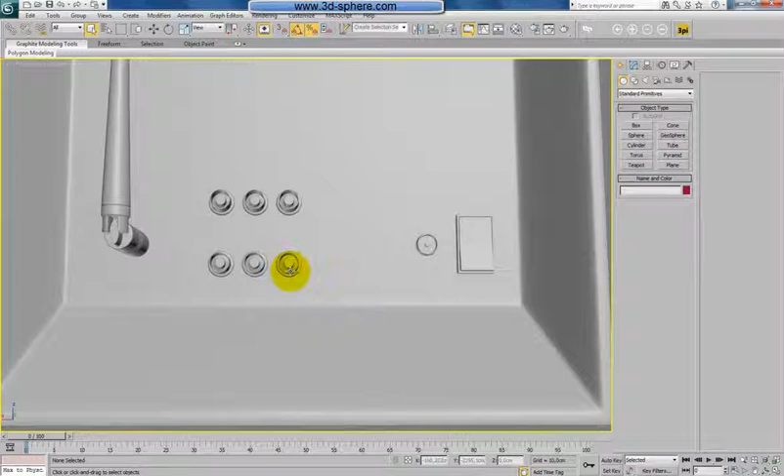So we'll continue with the DVD player here and also look at some details. By the way, I was checking the cinch connector, and if you don't look at something for a while, you will screw it up, like me. So I made a small mistake with the cinch connectors - the inside of the cinch is actually reversed. I'll show a bit later how it should look and fix this. But now I would like to start the DVD player.

I will hide and unselect it. Now, even though we will be rendering just from this side, I would like to do some details here, like the plugs and so on. First, I will select this edge here, connect, and apply extrude there.

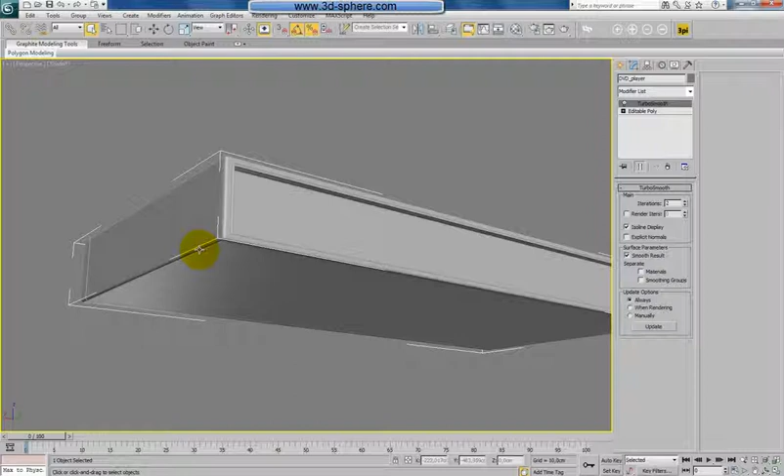This is for a simple reason - the DVD player should have a chassis which you can remove. It's this part, and we would like to show that this back part and the front plate will stay after you remove this chassis. Of course, we could do the cuts here, or model the chassis absolutely separately to make everything look real, and we could do a separate tutorial just about this, making every tiny detail. But we are not going to sell this model, it's part of the home theater, and we'll always be rendering this from the front. Still, we are going to do some details here.

So first I will delete this. Now I'll be working just with this back plate. What I will do is select all the polys here, grow that twice, then select, edit, select invert, detach this part, and hide unselected one more time. I did this because we'll be working just with this plate, making some shape merge stuff, deleting some edges, chamfering, and a lot of stuff with this, and I really don't want to mess up the front panel. We could accidentally select something like this - there's nothing. We could actually work in isolate mode too, but I think it's the same and does the same stuff.

Okay, let's go to the back view. Now we'll draw some rectangles here to show the separate parts, mostly using the rectangle tool. First the HDMI port. I'd like to do 4 HDMI ports, some USBs, the cinch for audio and video, and the power plug and power switch. This kind of detail, I think it's pretty enough. I don't want to do a SCART connector - it has a lot of holes, and to make that will take a lot of time. Anyway, nobody uses that anymore.

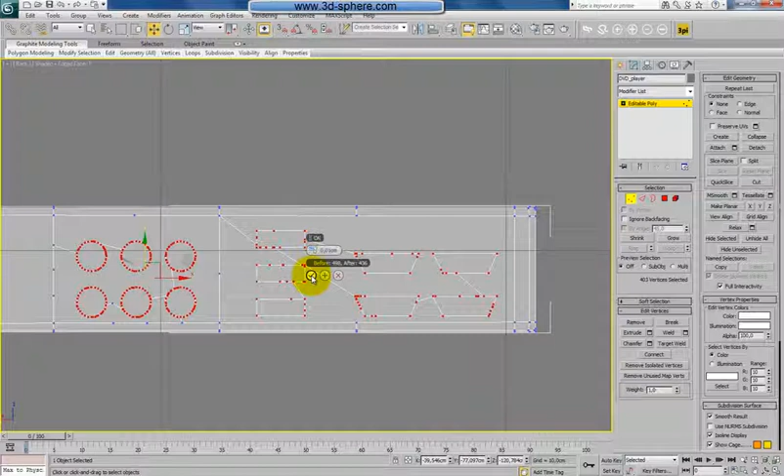So let's go here, compound objects, shape merge, pick a shape. Okay, convert to poly one more time, select the shapes, delete. Let's go here. First of all, vert, weld the smallest value, and we will get rid of a few verts, but it's also a help, of course.

And now we will start to edit this. We'll delete some of them, of course, but we'll also place there some cuts. So what I will do is already try to attach the shape to the rest. Of course, we are creating now triangles and n-gons, but still I think this method is quite better than using just the boolean.

I hate to use the boolean. I never use that, you should notice that. So I rather make this really by my own and create these shapes like I want. There is more control about the overall shape later. Okay, I hope I didn't delete anything we need.

So a few more cuts here, and because the behind is flat, we actually don't have the need to watch for some distortion after. Okay, I'll delete this for a while, and after I will do the first inset, I will connect that back.

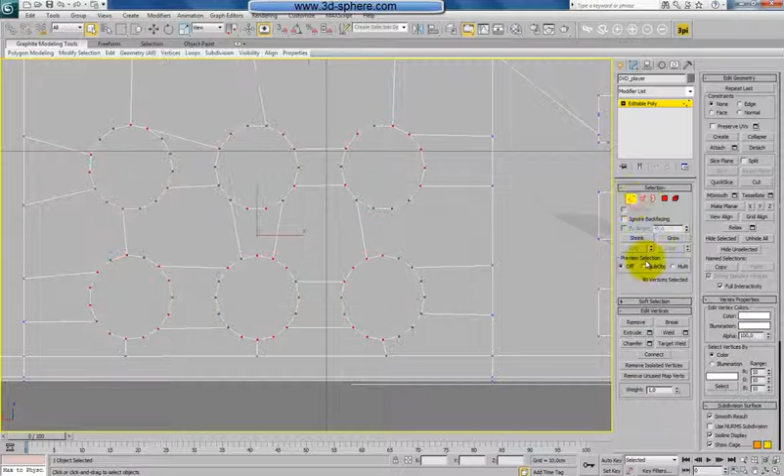Okay, now again, first the cut. We can use these ones which we created before. We don't have to create triangles all the time. We will also do some quads, of course.

I'm doing this before I do anything else, because sometimes it can happen that you just lose the shape. Like it will be lost from the rest of the bodies, so from the back plate in our case. And this is really a huge problem, because there's no way to attach it back. So I have to start once more time.

Okay, now again we'll delete the verts which we don't need. This is just a rectangle, and after we'll try one more time the weld. Okay, let's go here.

So we'll again perform the cuts. This is also an easy shape, so it should go without any problems. I hope we will have no problems here. I'm not sure if we will be able to finish everything I want just in this part.

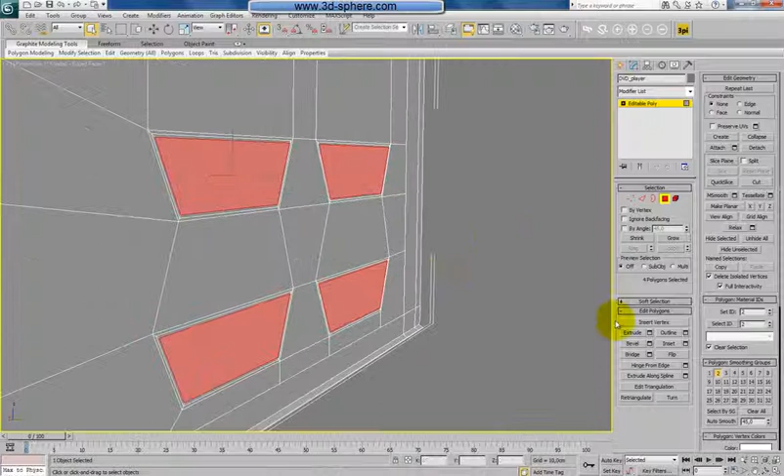So this is the first step. Now let's start here. Okay, orthographic view, no, perspective. We want just perspective, we'll go here. And now we'll extrude this shape back.

Okay, we can perform an inset again. We can go actually with the smallest one. Or not? Yes, we can. We'll apply, and we'll do one more, but this time a bigger one.

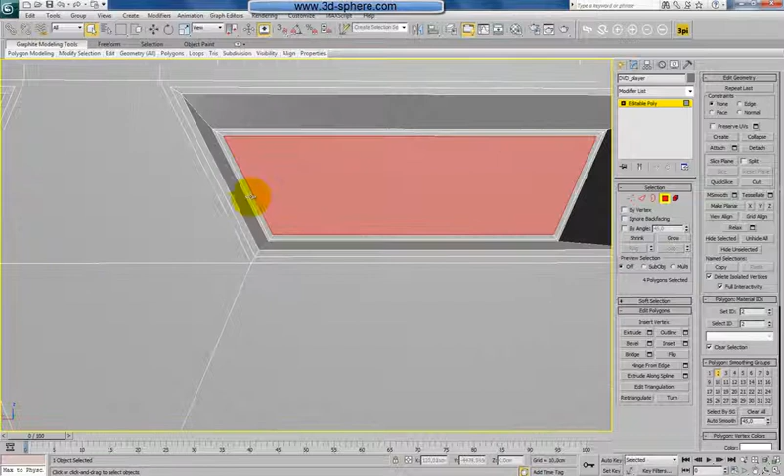Now we need to select actually this inside. So we'll select these small edges here, not that one, but this one. Again, that one. During that, Control Poly, we'll extrude this up.

Now we can extrude it like this and just move it generally somewhere here. Yeah, this is perfect. No, I'm sorry for that, one more time. Okay, no, I'm fine.

Okay, now let's go back here. We'll go to the back view. Let's go back, Z to zoom. Now we'll perform a bigger inset here, something like this. Perspective, Z to zoom. We'll extrude this

somewhere here. Control H, and we'll perform here, I think, a small chamfer, the smallest one. We'll select now the inside of the shape, and actually we can select also this here, so these two edges. Loop everything, again chamfer, the smallest one.

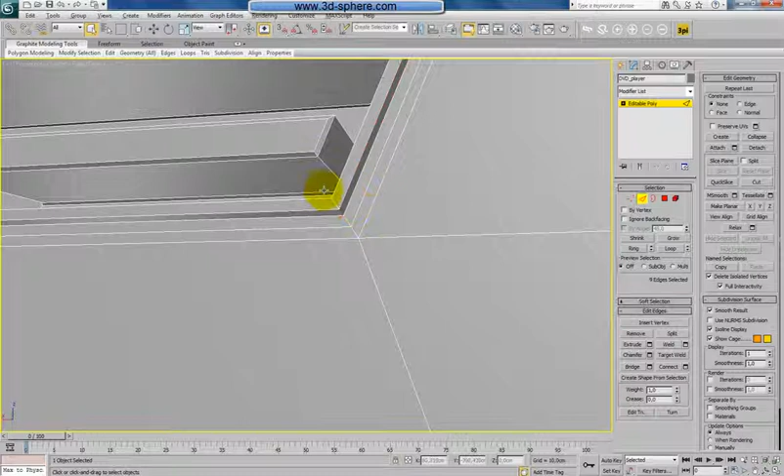This here, just to be sure. Also this one. So this and this, and also this one. So I think - okay, too much, both are too much.

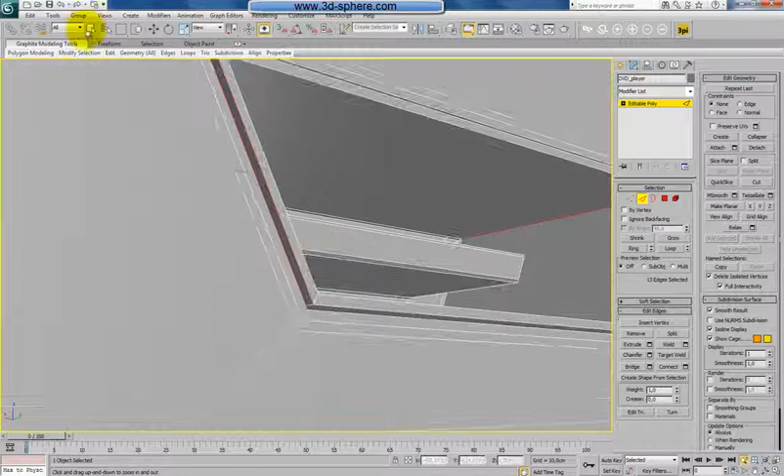So this here, ring everything, connect two times, and we'll move them somewhere here. Okay, now let's select this edge.

We'll make a small extrude. Oops, but loop that, of course. Like this. So here we go with the HDMI ports first.

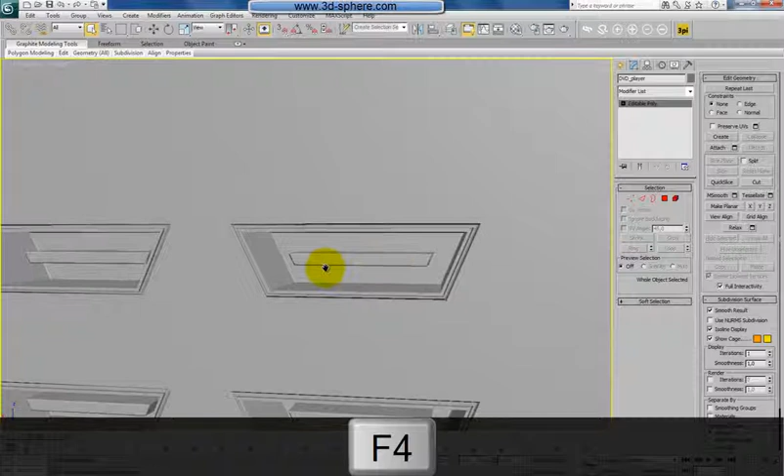I hope they are not too big and not too small. I think they're fine. I don't have here any reference, but I also don't want to create any special HDMI ports because it will take time, and we don't want to waste any time.

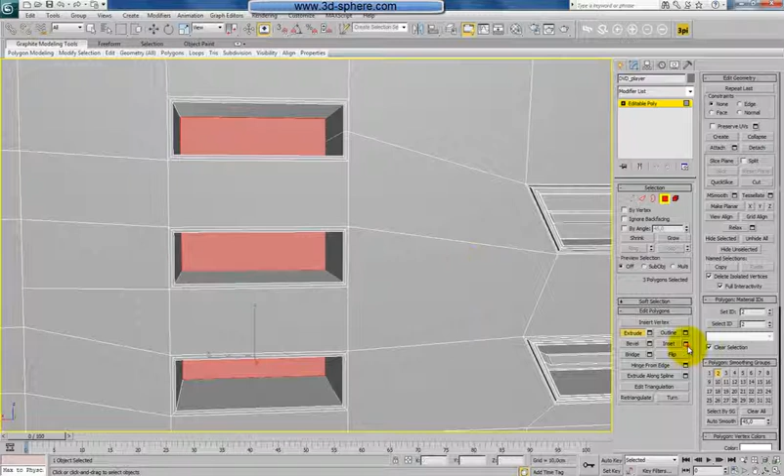So now the USBs. Just extrude it back and inset. Yeah, this is a good value. We'll move them down or up - maybe up would be better - and extrude them somewhere here, a bit to the back.

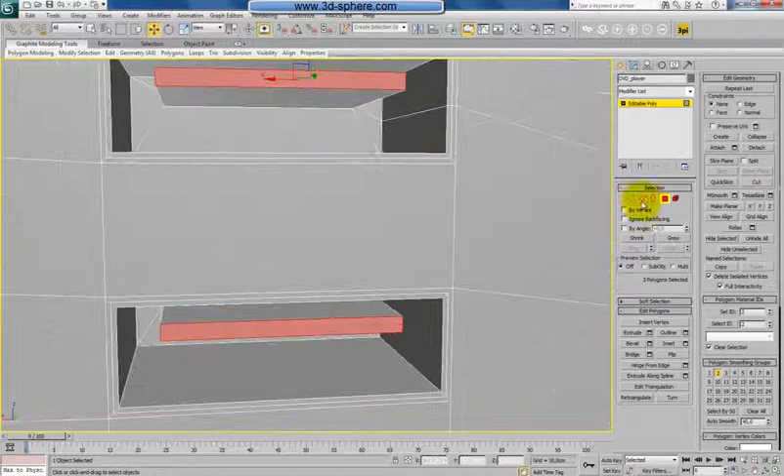Okay, first of all, we'll make our extrude. So loop that - no, extrude. The same value like before we can use.

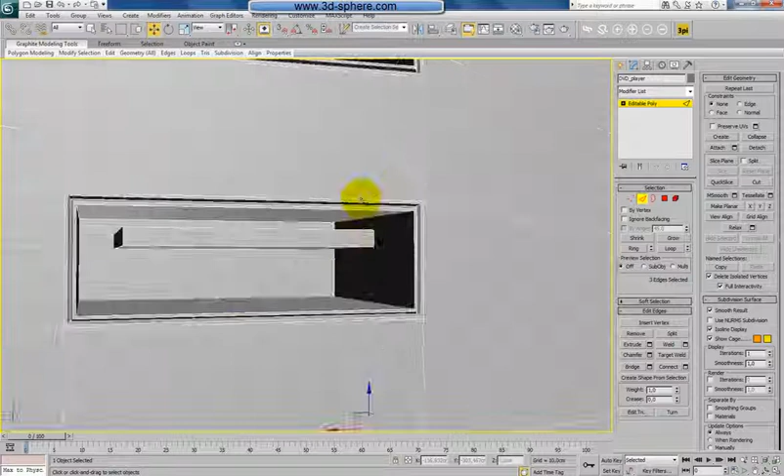Now we can select this and this shape, or this and this edge, also this and this, getting everything. Now again, connect twice, but the value right now will be a bit different.

Okay, I know when we apply turbosmooth it will be a mess at the beginning, but we'll fix that later. Let's go here. Now, there we were going inside, here we'll go outside. So, something like this. Now inset once.

Inset a bigger amount, like this, and go with this back. Of course, more deep would be great. That's fine, I think. A bit more.

Okay, better. Control edge, chamfer, the smallest chamfer. The same here. Loop. Okay, we'll see how to do the other edge. So far we'll do just the inside.

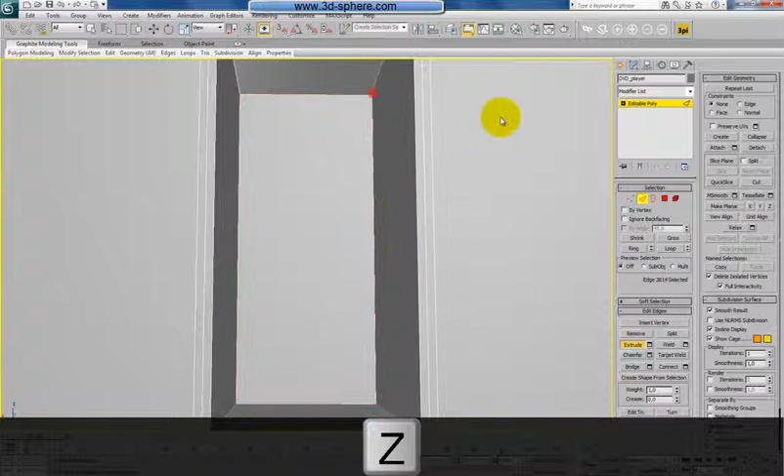Just in a moment we'll fix that. Here, now first let's go here. Now here we really just need to do extrude back. Then we'll do the power switch. To save time, I will zoom here. I will ring this. We don't want to extrude. Connect twice. We can leave the value which is there and extrude also here.

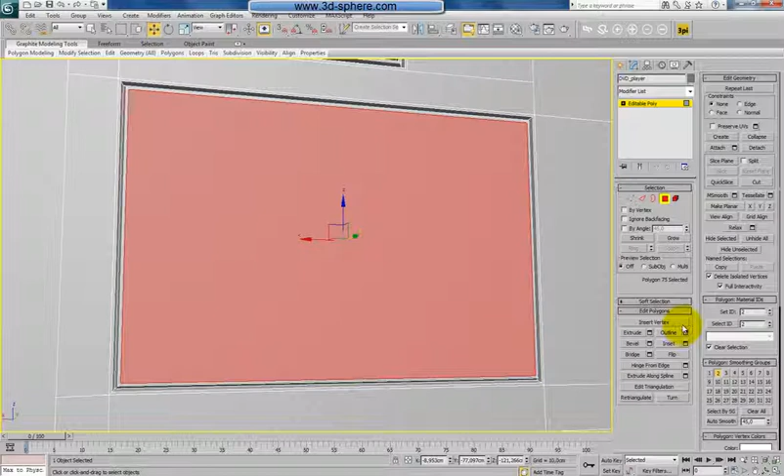Here something similar. First, this one, extrude down. Now here we have this shape. Now we'll inset this, quite a larger amount, and we'll extrude this again back to something like this.

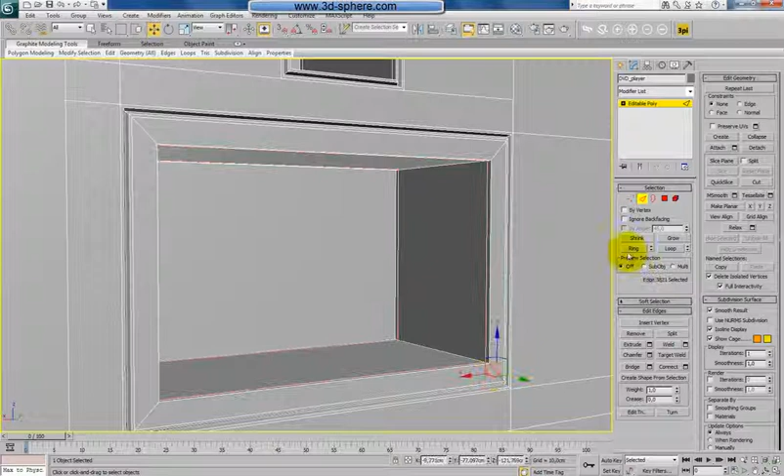Now we will not do any special things there so far. Hit OK here. Bring this, control poly, extrude quite a small amount like this, and here we can do a small chamfer, and on the other side loop them with the smallest chamfer, and we will do the rest just by placing the elements there.

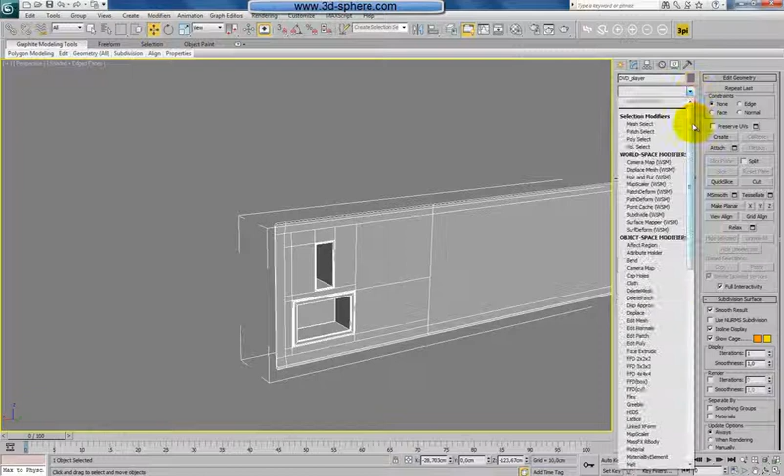But now, because there is a turbosmooth part, we will have lots of mess, and as I said, these ones are looking good, but the rest is looking like a mess. Okay, we can start here, I think. So first of all,

I will attach this one here. Now select one edge, ring them. Okay, select this edge, ring them. I will hit connect and hit OK. Now select this

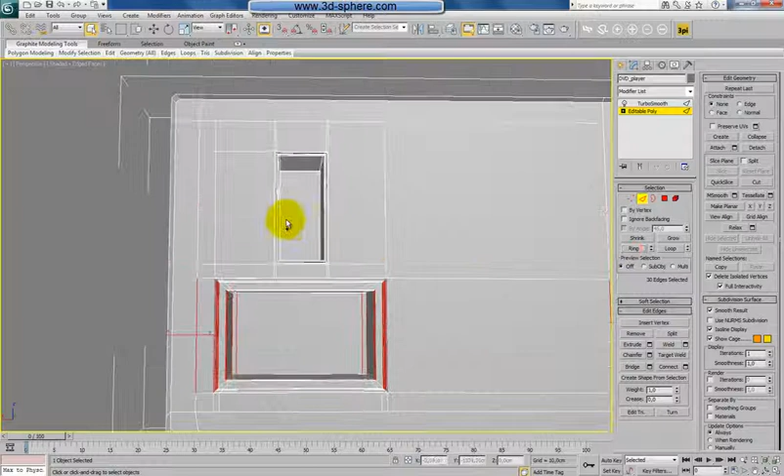and this. Okay, without that, just this and that. Again, connect. Adjust the value a bit. Okay, right now here. Connect. I hope you will have no problems. Similar value.

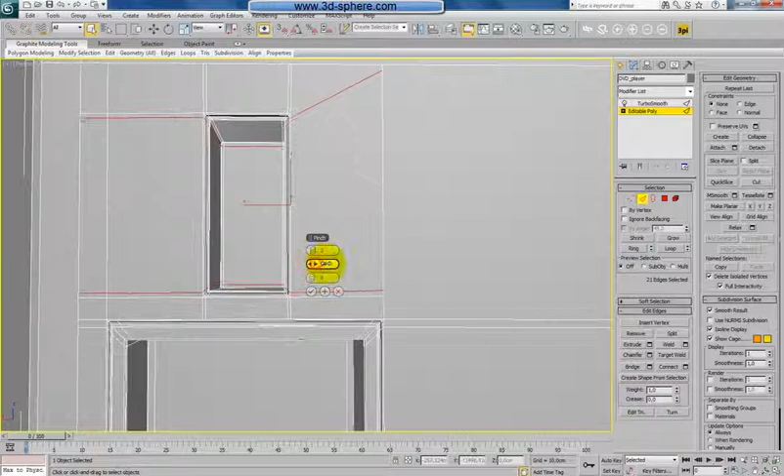Now it's looking much better now. Still not perfect, but much better. And after here we have some cracks and so, but it's fine. And actually we can look at that, but some of them will disappear after, don't worry. So I think it's fine at the moment how it is.

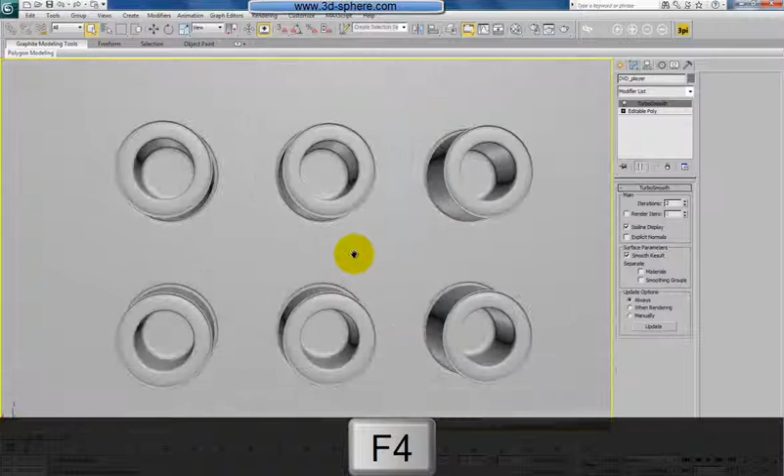Okay, let's check this here. Yeah, like this should look the same. So the inside, like I said, it should be reversed. I did it absolutely reversed. Okay, we'll just perform here an inset.

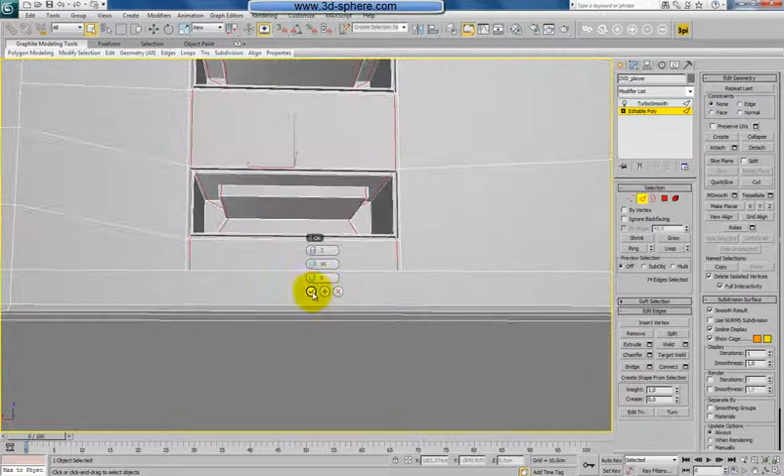Now let's go to the edge mode. Select our USBs, ring them until the upper shape also there and there. No, connect. Okay, this is a great value. You will have a problem. So what I will do here is I will perform a cut from up to down.

So now I can just select these edges, and yeah, here's also a small problem. Okay, this I will do after. First I will do this, to ring them. We should go from here to there. I think also here. Connect.

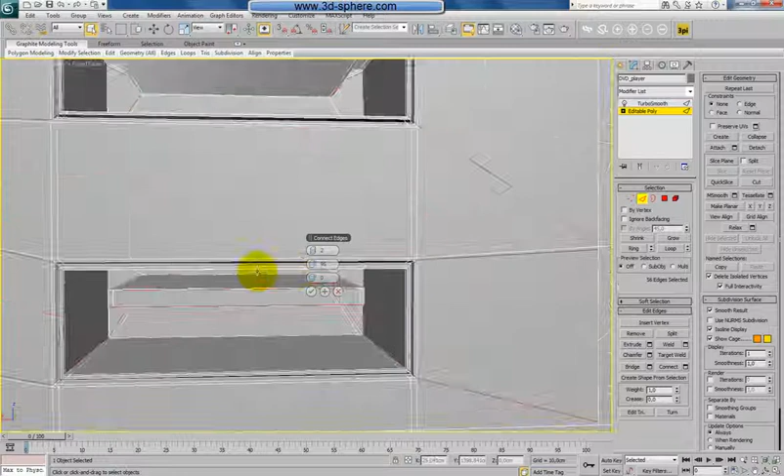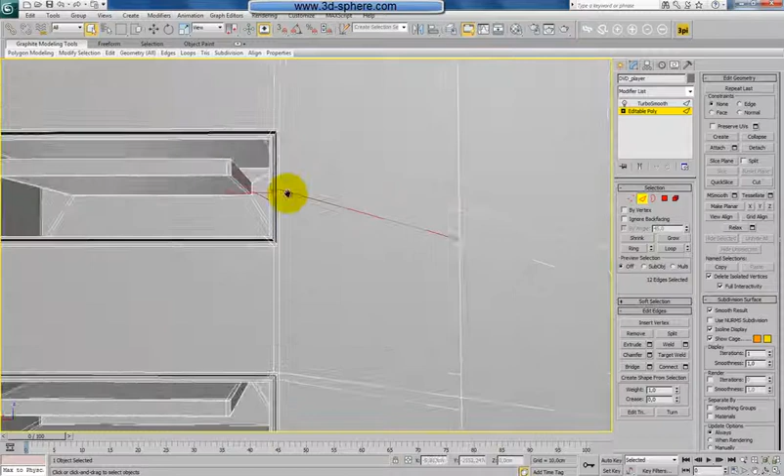Change the value a bit. Something like this. No. We can select this one. Deselect it here. And actually, control vert, edge, backspace, and backspace. And some kind of useless shape was there, I would say.

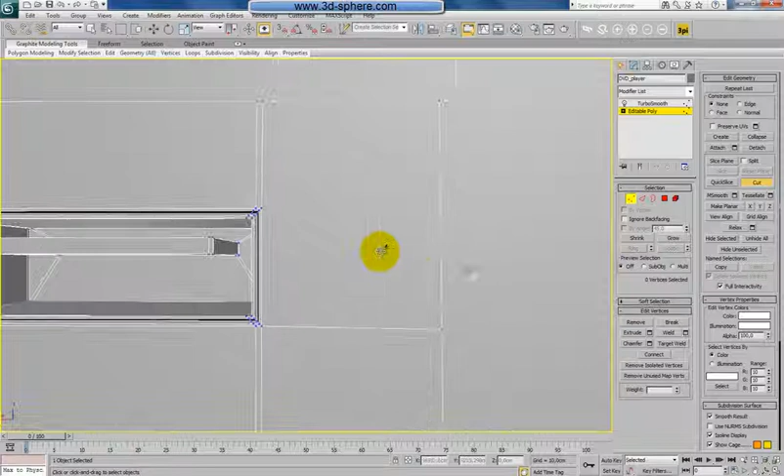No. Well, anyway, perform these two cuts, and this one here. So now we should be able to do the same thing we did before. So ring and tell there and here. Connect. I think we can use the same value. Okay, let's look.

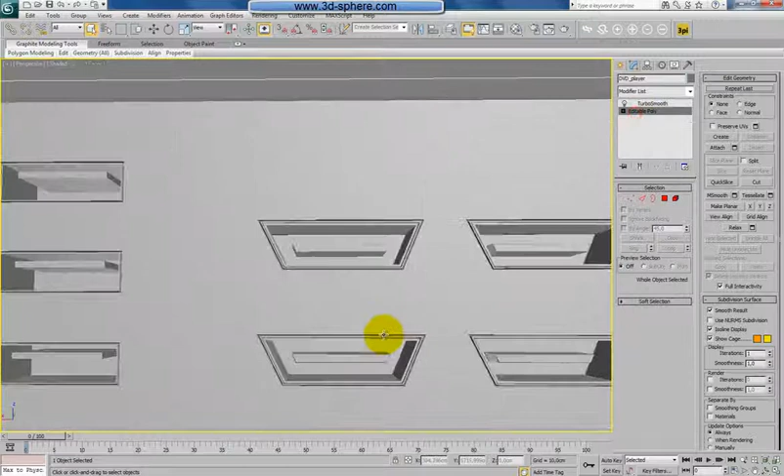Okay, much better now. No, I think they're too big, but no, it's fine. And the last part. Yeah, you are guessing right, it's a very similar approach. Almost the same, I think. More or less the same.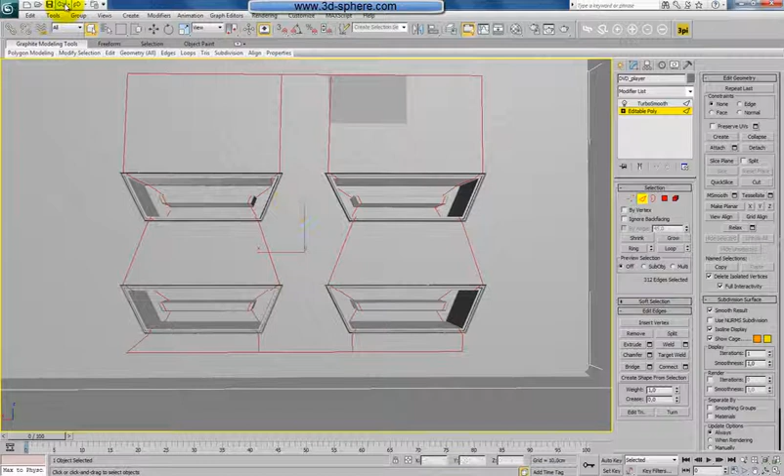So we'll perform the disconnects here first. Let's do this a bit more round because it's HDMI. Okay, wait, one step back. It was just looking like we are connecting too much, so I would deselect this and do this just here so far.

Okay, now it's not doing anything. So we'll perform something like this. Select, connect the same value.

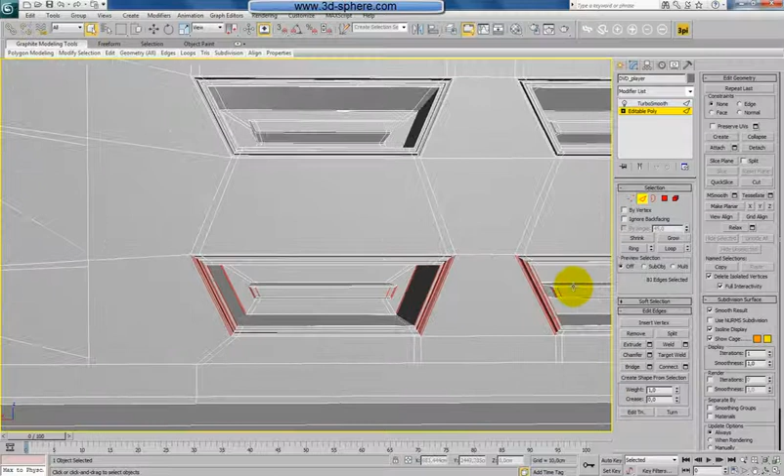Now we'll ring this one until here, and yeah, here. Connect, we'll make the value smaller again. If we are here, we'll use Target Weld. Weld these together, and do absolutely the same thing also here. So again, we are using the hard surface modeling technique.

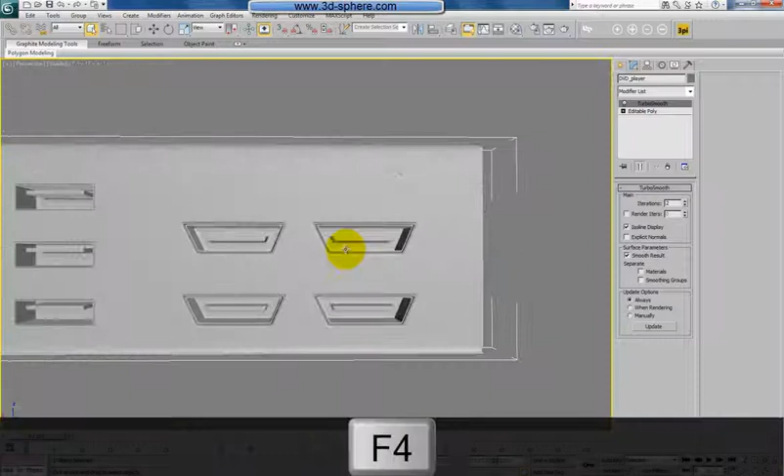It's quite easy. Yeah, we're making a lot of new stuff, but that's fine. The HDMI looks quite nice.

One thing I will do here, I'll select all of these, ring them, connect just once or two times, like this. Okay, so we have these things here, and actually all the ports. Now we could also do there some kind, really a lot of stuff, but why to waste time by modeling?

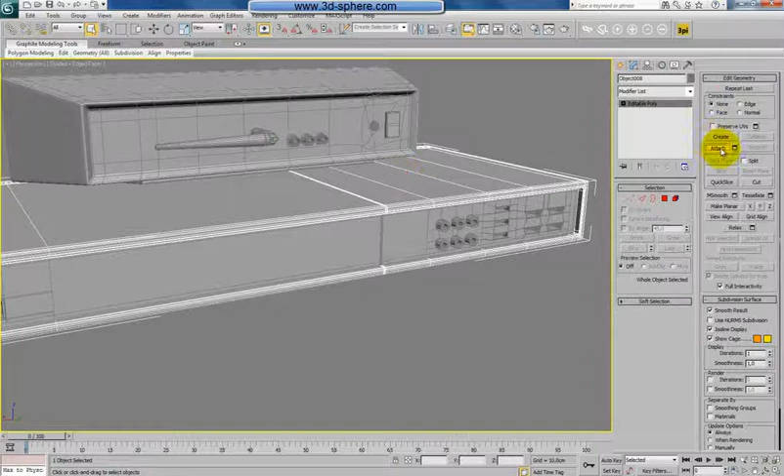We can create an even better map. So right now I will unhide, delete that. Now we have here two shapes, we need to weld them together. How to do this? Of course there's more methods. We'll select this one, attach this one. Now when I do this, I should have selected some edges. Control Edge, bridge.

Okay, this should work, we'll see. TurboSmooth, two is a line. Okay, I think the bridge was working, but not everywhere, I think. So I will go two steps back before I did that. Oh, it's strange that it wasn't working how it was intended to do.

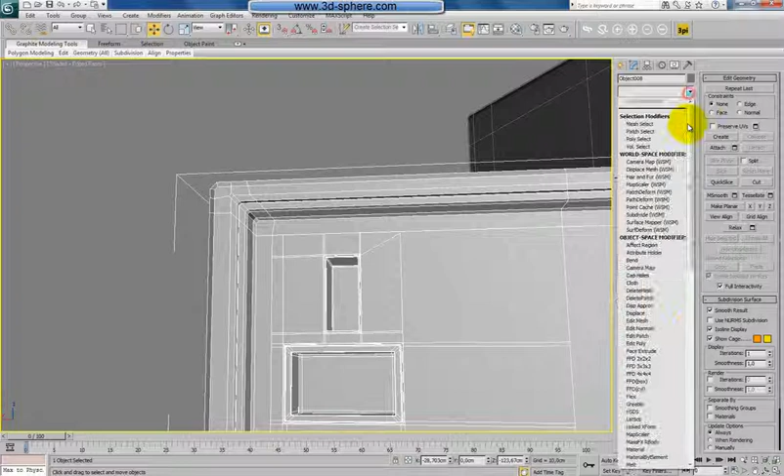So I will try to do this. I'll select these two edges, bridge them, and now I'll select these two borders, Control Edge, and again bridge. Now it should work, well, we'll see in a moment. I'm pretty sure that it wasn't working. Okay, now I think I will stop experimenting with this kind of stuff.

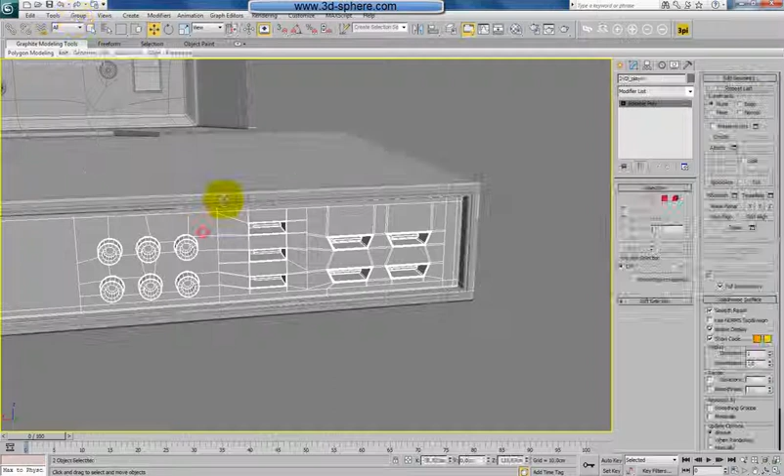Okay, now we have two shapes. We have the same amount, of course, of edges and so. So what I will do right now, again I will attach these together. If we go to element, we have here this. And no, this is strange.

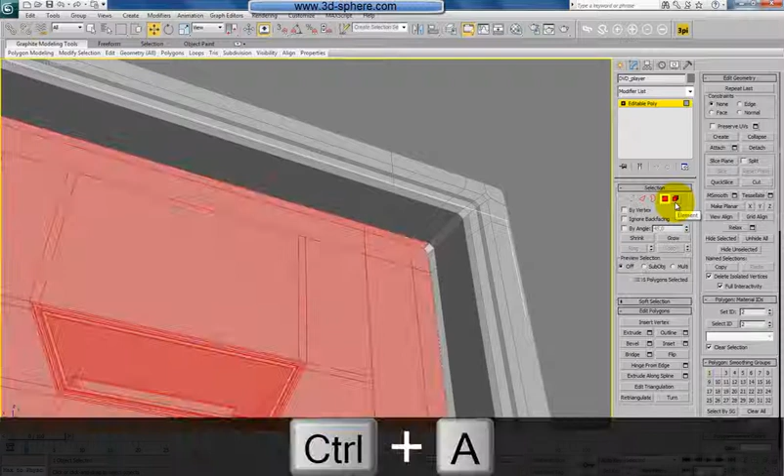Wait, let's go step back. What I have done, okay, let's focus just on these two. So hide unselected, so we have this panel here. Should I think why it's not working? Yeah, how the hell I did this? Quite strange. Not a problem at all, but this explains why we have the problems.

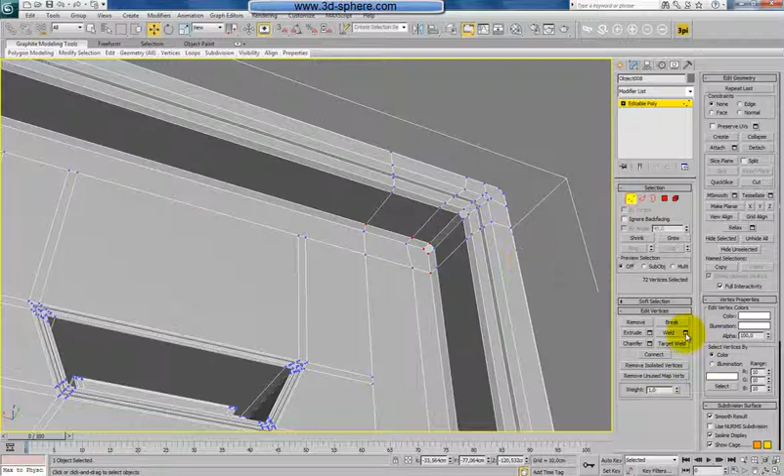Okay, so select, attach, borders, both borders. Control H, Control Vert, weld the smallest value. It shouldn't weld anything else, it should be quite absolutely fine. Now it should be attached, we'll see in a moment. Yeah, it looks that it's much better right now.

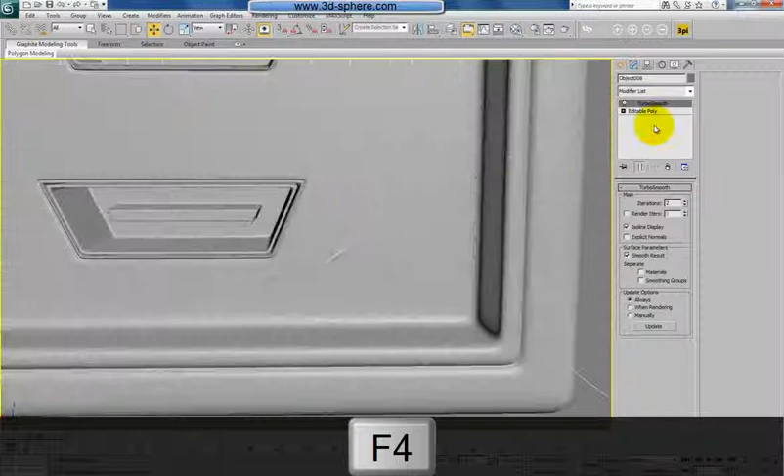Okay, we'll have to make some larger cuts here, or perform them a bit more down in certain places. Like here, I think I saw something similar also here. But this will do just at few places I was at, so it's fine. Now let's go to the bottom, but when we are here, we can, just to be sure, make also this.

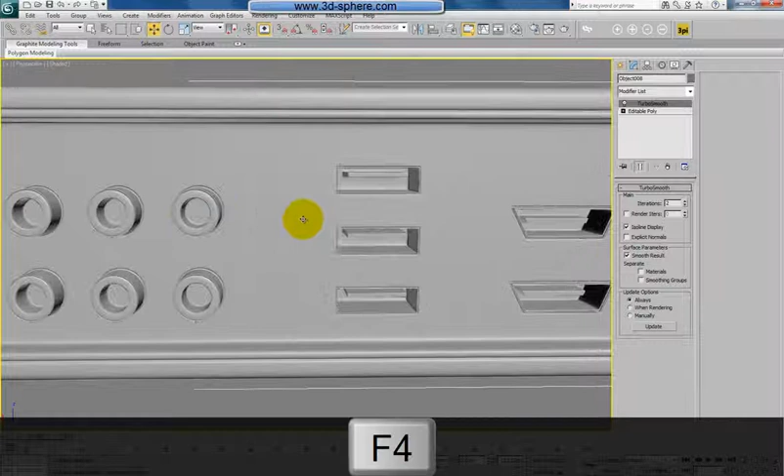Okay, let's look, it should be okay. It's okay too, so we have that and that, and few more. Oops, F4. So, as you can see, quite fast. And yes, how I said, we could do so nice details here, so many of the details.

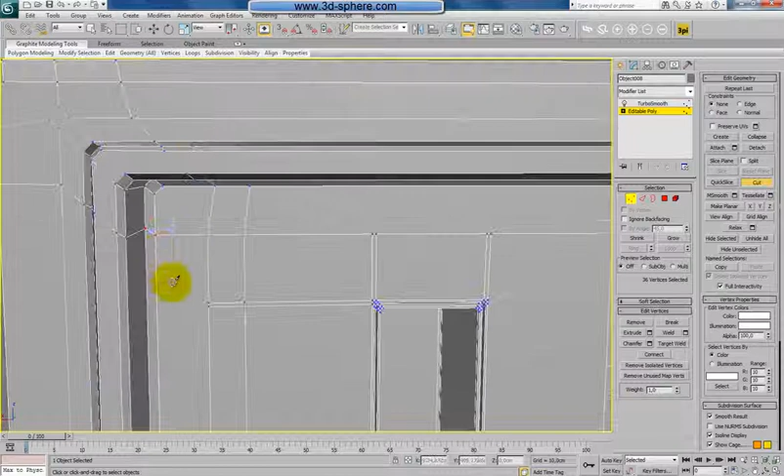But can you imagine that we will be modeling like one HDMI port for one hour? Let's say this just for example, I think you will kill me. It will be like a tutorial about modeling an HDMI port, not about modeling that. So nice and clean geometry, the back plate or the back plugs attached there. Okay.

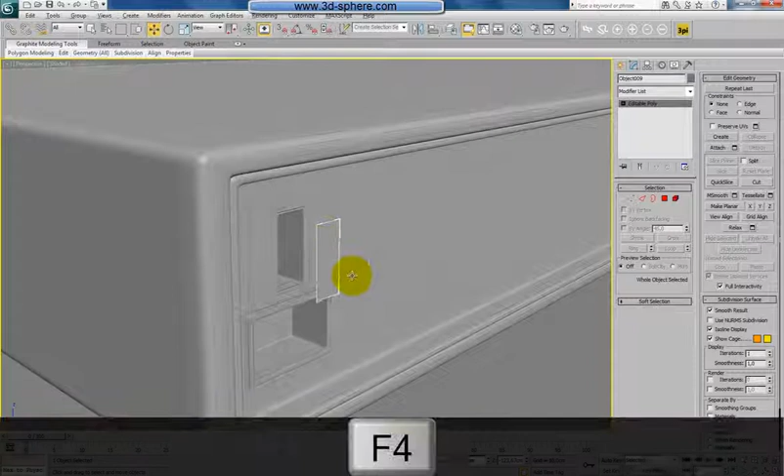Now we need, how I said, the back switch. So I will select this shape, hold down Shift, place it up, clone to an object, select that, just a single shape, hit the border, Ctrl H, hold down Shift, move it to the back, somewhere here, back to the border, cap that.

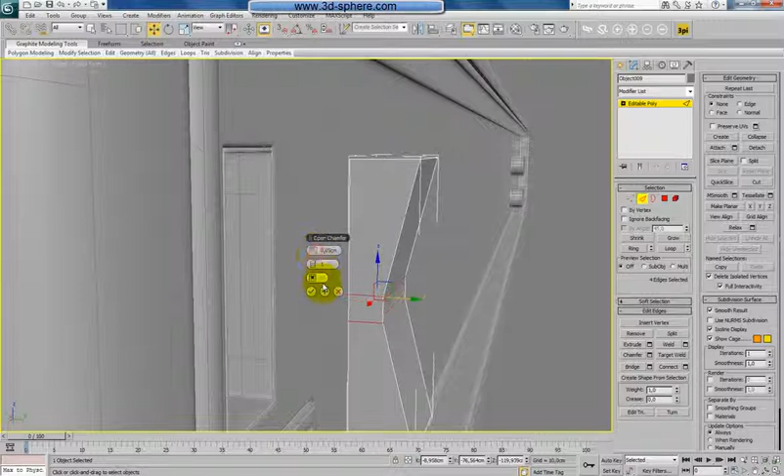Now, oops, select this, connect, of course just once, select these here, move it straight to the back, loop the connection, chamfer it, like this, to have it nice and smooth.

Now, yep, why not? Select that, ring everything, deselect this, chamfer, the value, let's say this. Now we'll need to select the rest of the shape. I think something manually, something will be just looped.

And also the back plate on the back side. Okay, where we are, here we are. I don't see anything, let's move it a bit. Affect pivot to the center, much easier to manipulate.

Okay, so, how I said before, select also this on the other side, loop if we can, chamfer, can use the same value, apply here turbo smooth modifier 2, so we'll have a nice and smooth switch.

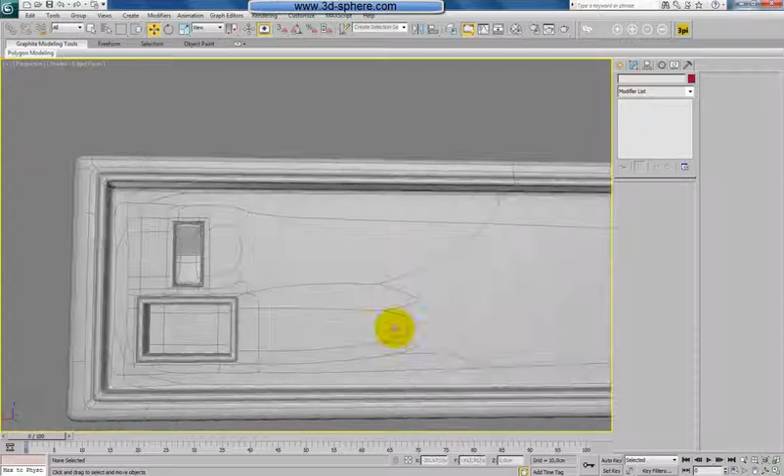Move it somewhere here. Rotate that. Probably move a bit more to the deep. So this is the switch. Now here, this will be funny. What I will do here.

Now I know how the power cord to a computer looks, but I was too lazy to make such a shape. So the only thing I will do here actually is I will create a box, big like this, let's say. Perspective Z to zoom. Convert it straight to poly.

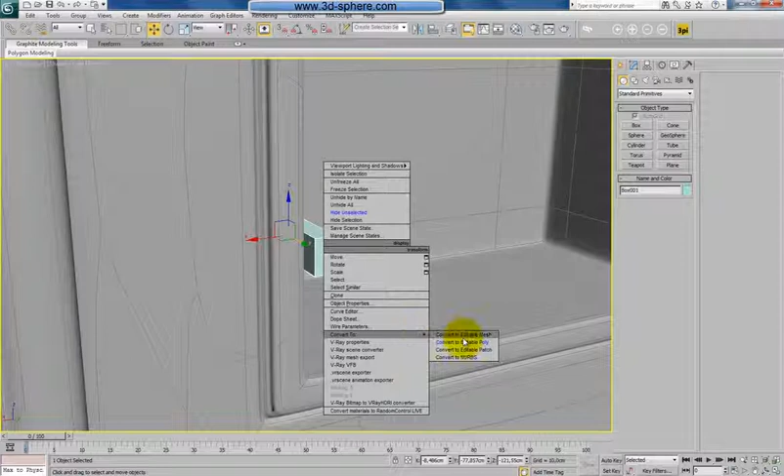Select also this here, like this. Now I will hit the bevel, and we'll go a bit away and inside, like this. Now connect, my bad. Where we are, there we are.

Move it to the bottom. Ring this, connect, move this up. And select now this, ring them, connect twice, something like this. Select this, ring that, and again twice.

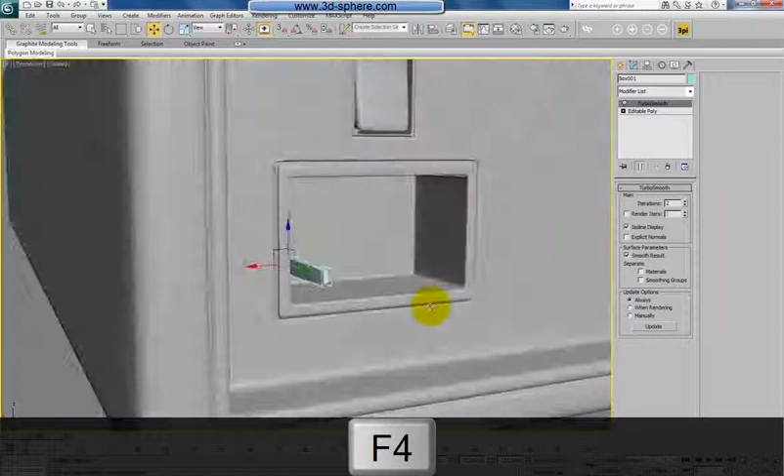Apply turbo smooth also here. And here is the pin for navigation. Okay, too easy, I think someone from you will kill me for that. But let's say we really don't need more here. Of course we probably don't need even this there, but if we started something, let's finish that.

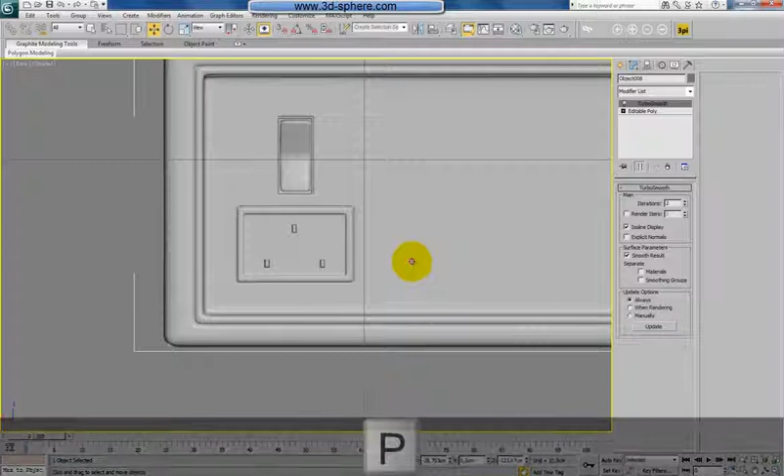Yep. Okay, we have that, and we are done with the backplate. Unhide all. Okay, it's looking much better with something in the back. And of course, now the cinch.

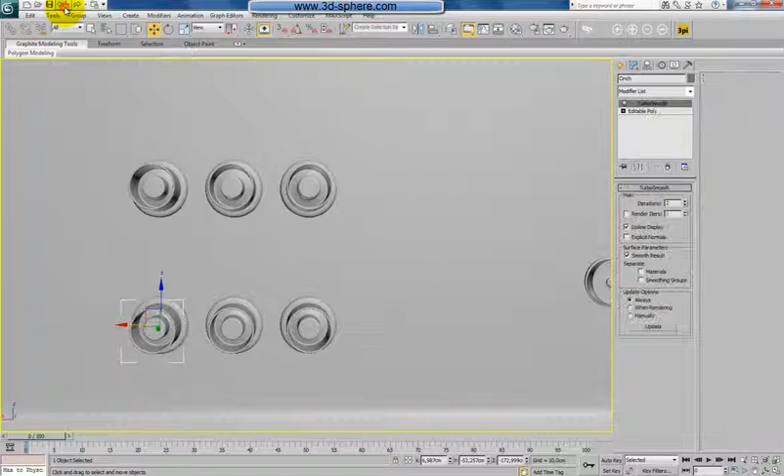Let's go here. Of course, we need to delete. No, we don't, why am I doing that? Let's go back. Yeah, but it's not okay. It's just one object. I thought like, okay, I will select everything, but of course I can't.

So I will do one and then just copy. So go that, delete, select this, cap. Oh, it's already capped. Select this one, extrude. Move a bit.

Yeah, like that, and set. That's a good value, a bit more. Extrude to the back, and the customization is done. Isn't that great? Select this.

Chamfer this. F4 to see the edges. Loop, chamfer. Select, loop, chamfer. And okay, this is too much a bit.

Yeah, I see the problem, the chamfer isn't everywhere. Okay, one step back, and one more time. Select this here, loop that, and chamfer. Now it should work a bit better. Yeah, now it's fine.

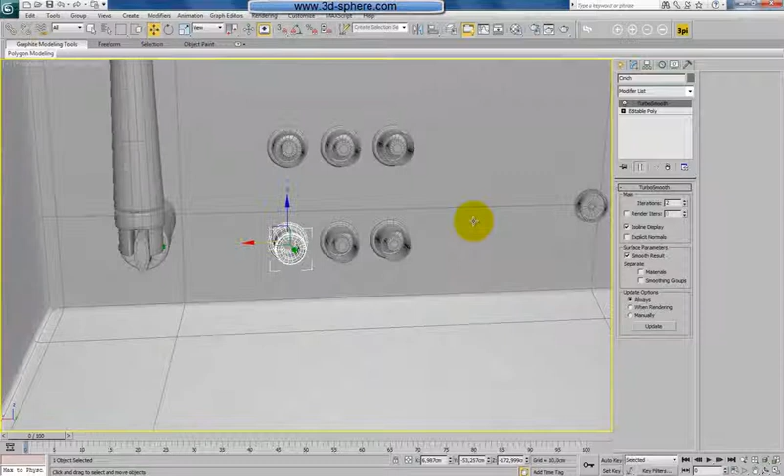Okay, so like this, I just did this small mistake. Right now I will do this trick. Delete that, move somewhere here. 2 copies. Okay, it's angled.

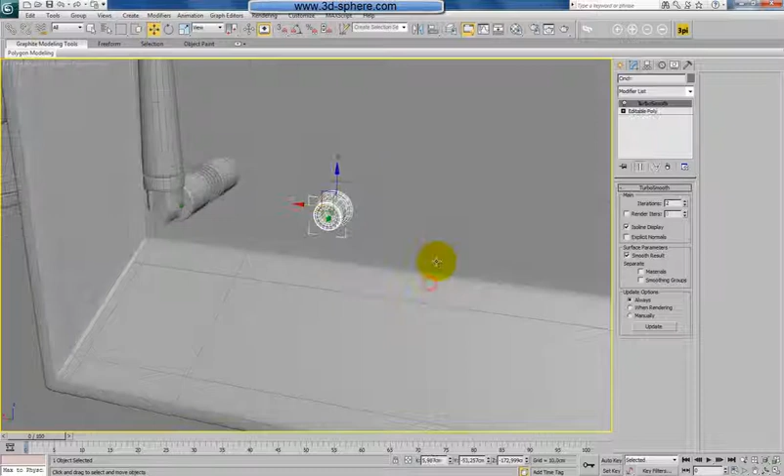Oh, how did I do the copy. Okay, it looks like in 2 axes. Oh, it looks like it's really angled, the background. Okay.

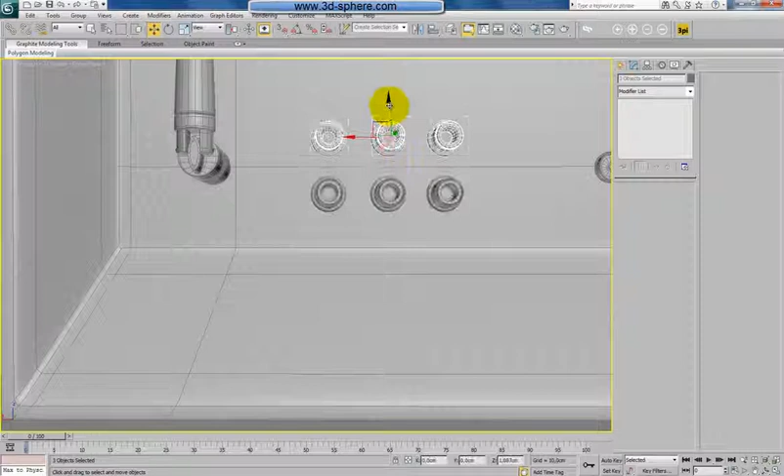So we'll do it like this, manually, step by step. Okay, the inside or the outer shape should be for the color coding. I'm not sure how deep we'll go with the materials here, so I will not promise that we'll do that.

And okay, rest of the details, I think it's fine. So okay, we're finished with the modeling process. Now, it took us some time, but I think we went with a quite nice result, which I really like.

Now, from the front view, we'll position also this one here. Perspective, and select like this, deselect this one. We'll move this one a bit. Now, select this, deselect this one. We can, oops, like this.

This wasn't a good idea. Deselect this for sure. Yeah, my bad, one step back. Come on. Now we just selected the subwoofer. No, still we are moving with one pin.

Now we are fine, okay, move it the last time. Yep. And oops, my bad, sorry for this. I'll move this a bit without the reference picture, just like that. On this side shouldn't be any detail, so okay. Okay, something like this.